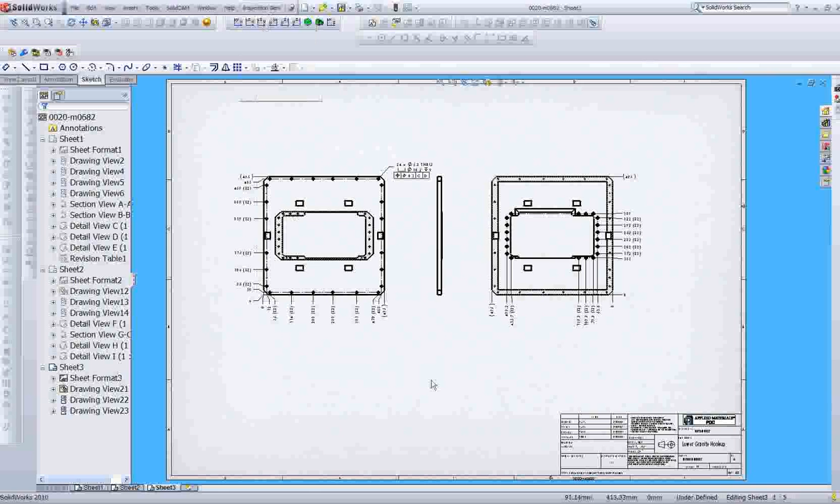Today I will show you the process of working with Inspection Genie. So we start by opening a drawing that we want to work on and starting Inspection Genie, a new project. We give a name and the name of the company that ordered it. Push the OK button and the system will do everything automatically.

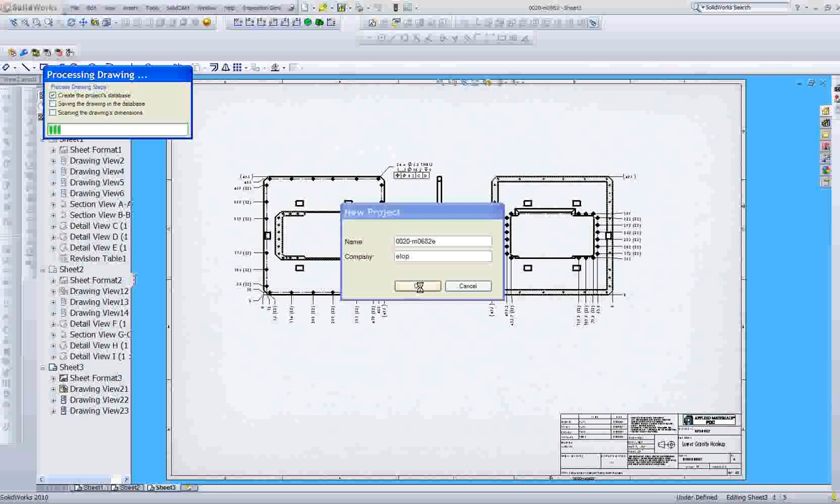You can see that the system is moving between the sheets and collecting all the dimensions. Overall we have 102 dimensions. When we close, the system will build the dimension tree.

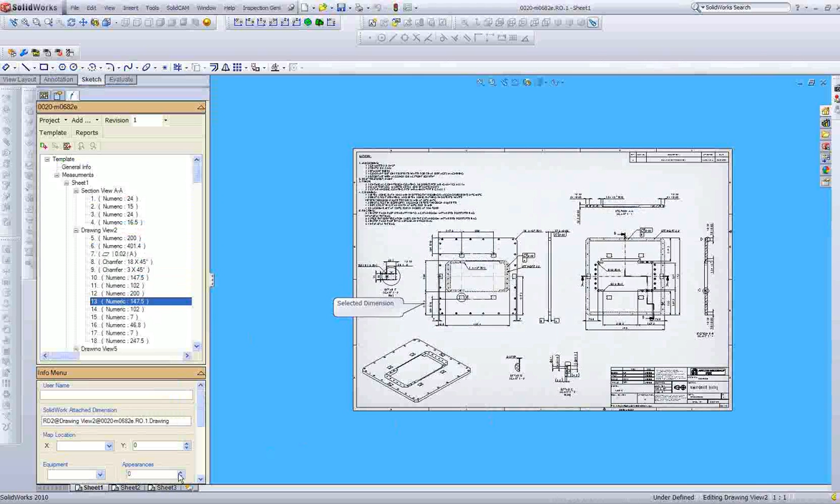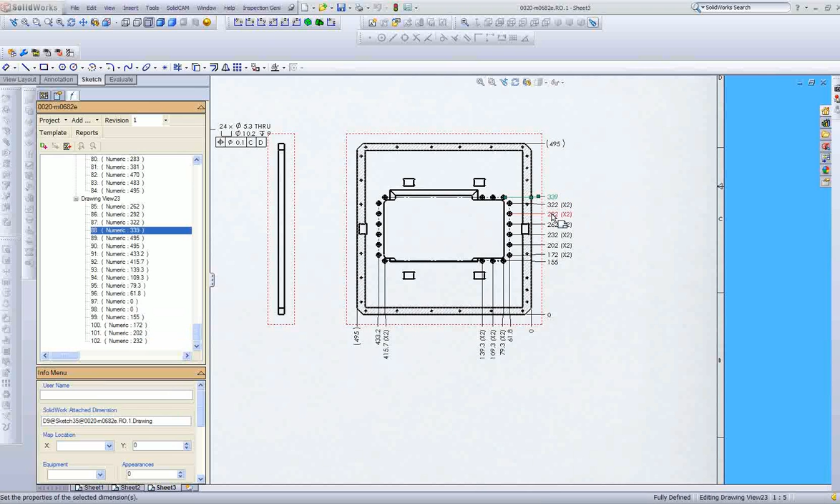Now we can move between the dimensions and see the arrow, the tooltip that shows us the dimension that we select. We can see that the dimensions are oriented around the view and so on. Another nice thing is that if we go to a dimension in another sheet, we just click on this dimension and the tree will be located in these dimensions, 339 and so on. So this is a bidirectional connection between the drawing and the dimension tree.

What we have here more: in each dimension, we have information. We have the naming of the SolidWorks entity that we select. This will give us later on the possibility to resynchronize a new drawing with a new version to get the same dimension ID. We can select the equipment with which this dimension will be measured. We can select a different type of dimension if we like, and we can check or change the default tolerance.

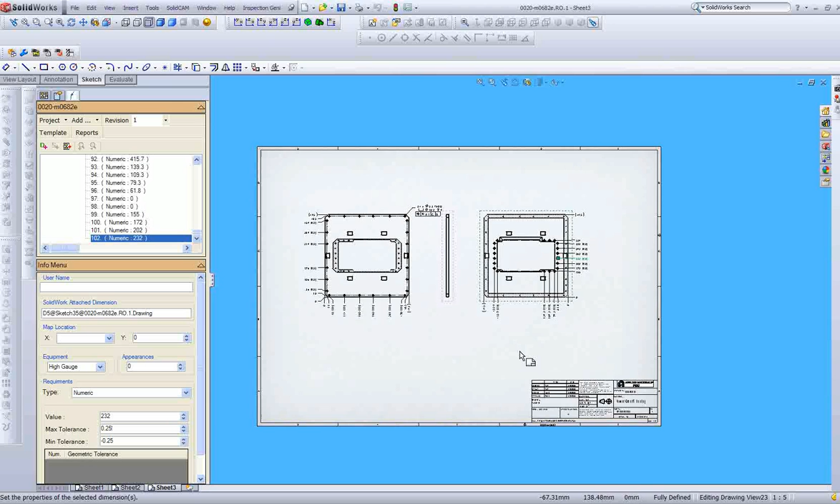If the dimension doesn't have a tolerance, normally we have to check what is the global tolerance. We see in this drawing the lengths or linear dimensions are plus minus 0.1, holes the same, and the angle is 1 degree plus minus tolerance. We can go to the project settings. We can define the linear. So we don't need all this after the decimal point because every length will be 0.1. So we can remove the rest. Any will be from minus 0.1 to plus 0.1.

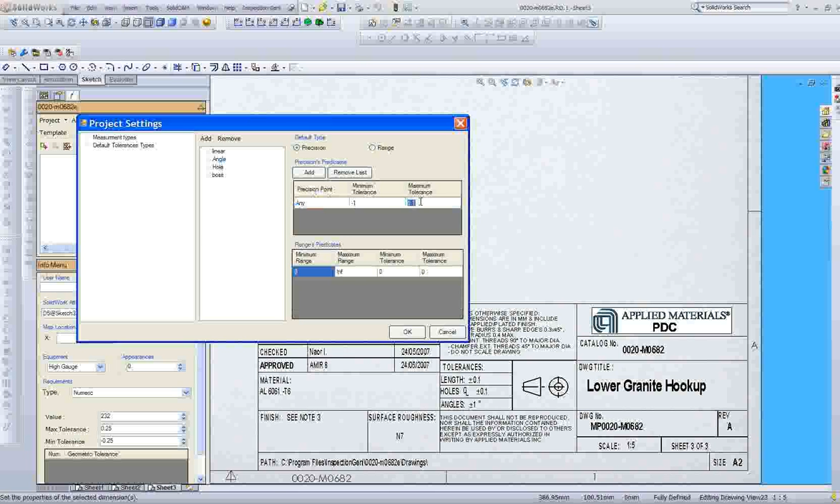We also have the possibility, if it was according to a range, from 0 to 100, from 0 to 3 millimeter, we can give this value of tolerance. When we go to angle, it's the same. It's from minus 1 to plus 1. This is it. So now when we are moving to a different dimension, we can see that we have now 0.1 plus minus tolerance.

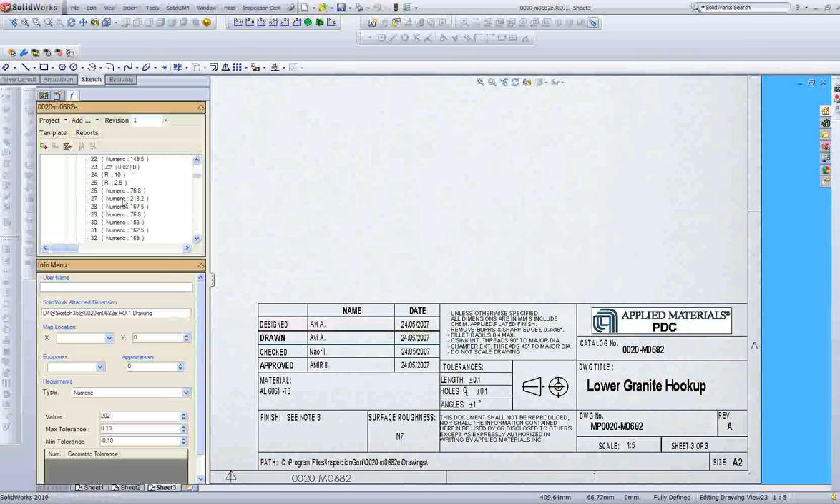If we have an angle here somewhere, I'm not sure there's an angle in this drawing. No, I don't see an angle. Okay, we can see the geometry definition. So we see that we find out things. Let's go to some holes.

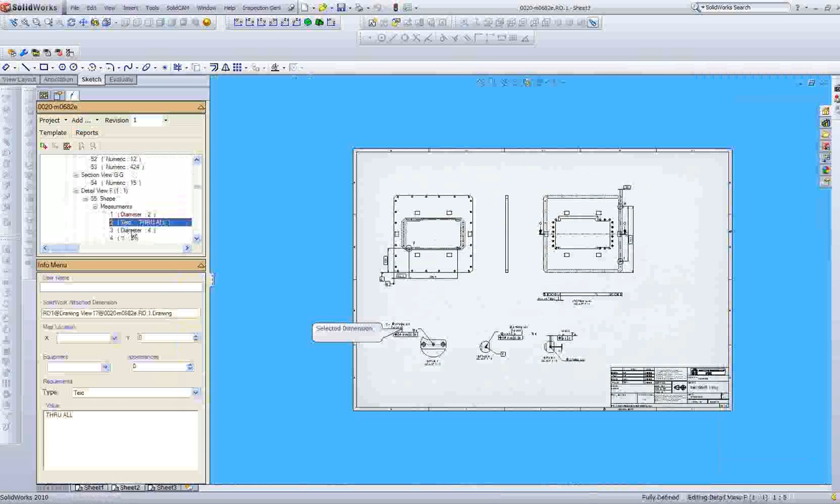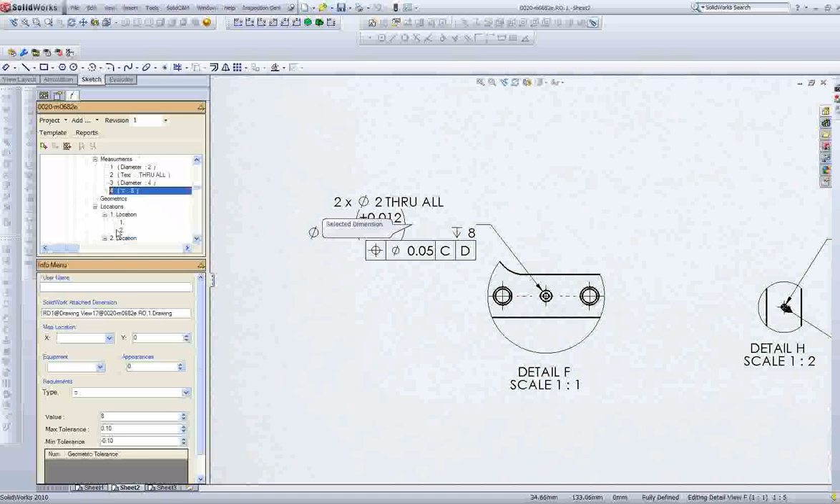The hole is what we call a complex dimension, a hole with a dimension. So if we click here, we are coming to this point, and we see that we have here diameter 2 through all, and then diameter 4 to 8 millimeter depth, each one with its tolerance. But we have here also a geometry definition of true position. We can attach the true position to the geometry here by clicking the button, click on the geometry, and the geometry is selected and attached to it.

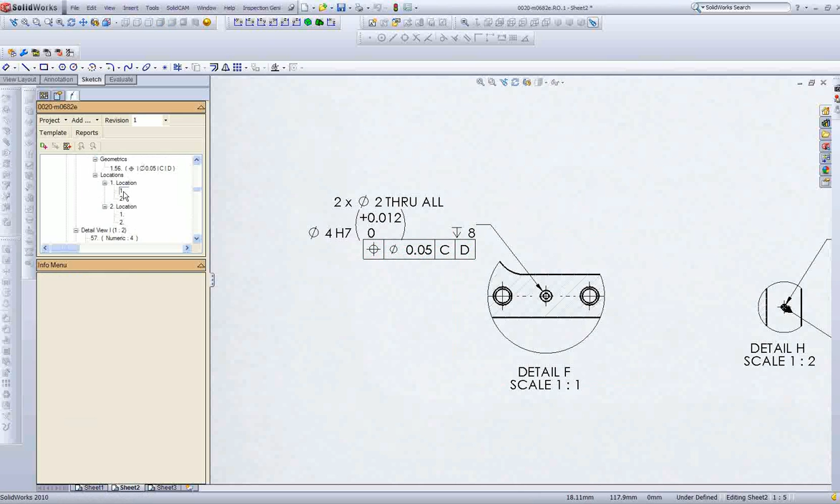We can also define the location in the same way, but we have to look for this location because this is a detail, so we have to look where the detail is. We don't do it now at the moment. If we don't fill this location, we will have a standard inspection report like you have today. When we finish all the dimensions, we set the tools and everything we want. If we want, we go to print. We can just print a PDF format.

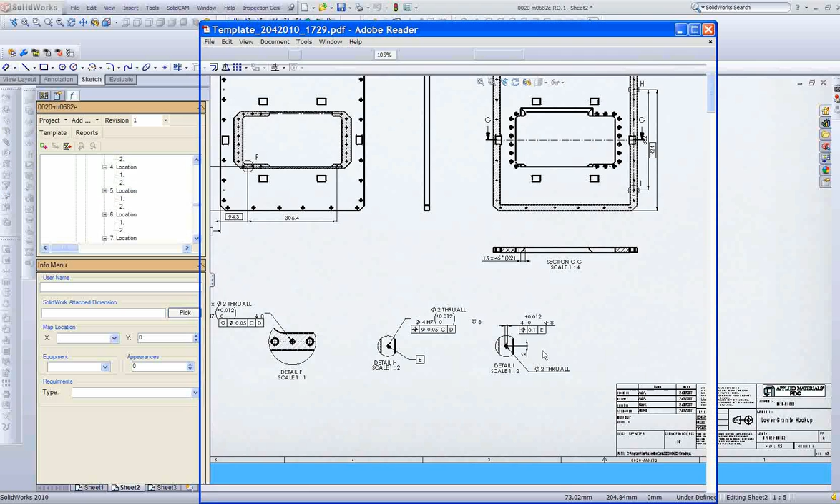The system is building the PDF, and in a second we will see it on the screen. This is the PDF file. We have here all the dimensions with the global or local tolerances. 102 dimensions like we found in the beginning. We can close this file, and then we can generate a drawing with the dimension ID.

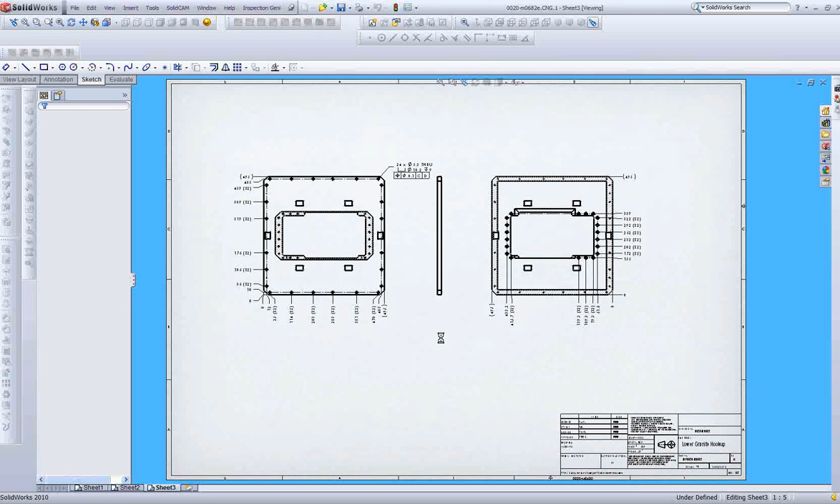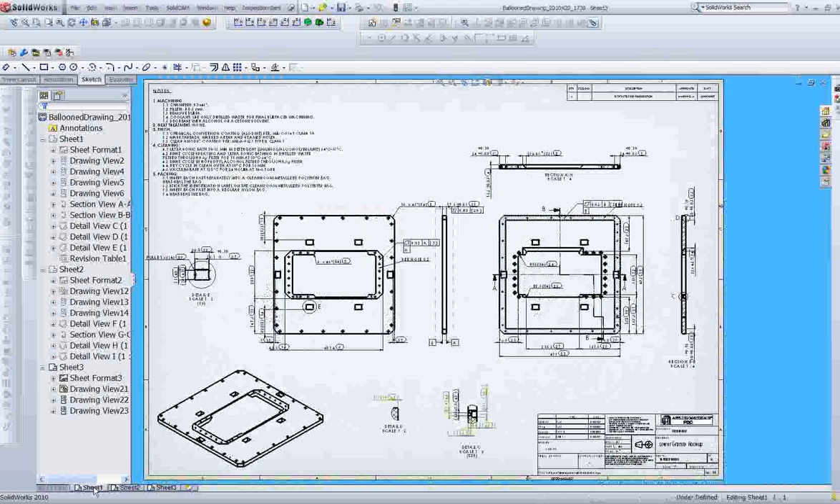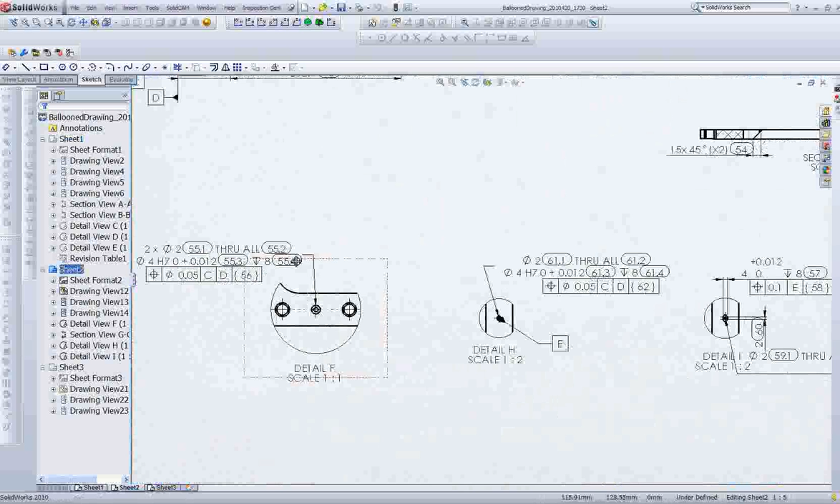We create a new drawing, and now we add all the dimension IDs into this drawing. In a second we can see it. This is our drawing, sheet number 1. You can see this dimension ID that we have here. We can move between the sheets. You can see this hole callout with all the dimensions we have to measure and so on.

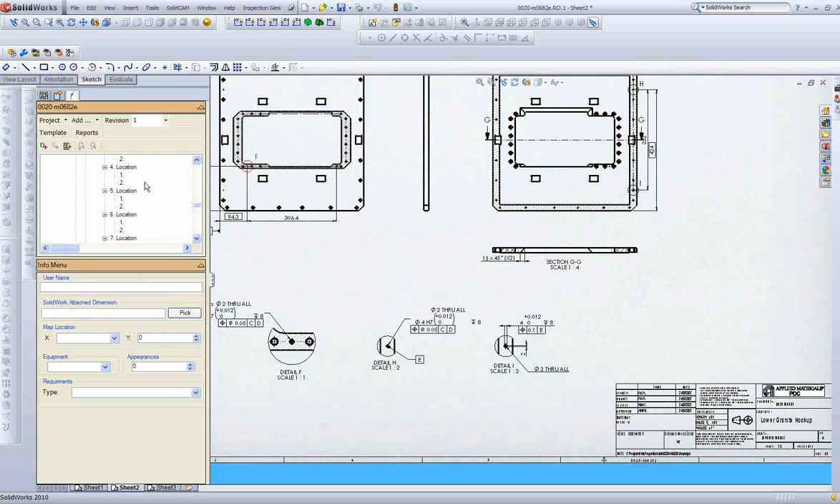Everything straight and smooth. We don't have to do it every time. If we do it one time, we have here extra files so we can print the file that we already generated before. This is what we are doing at the engineering level. So this is just analyzing the drawing and giving you the documents that you need for the inspection. The system also has the possibility to generate reports and to store all the information inside the system, but this we will show you next time.